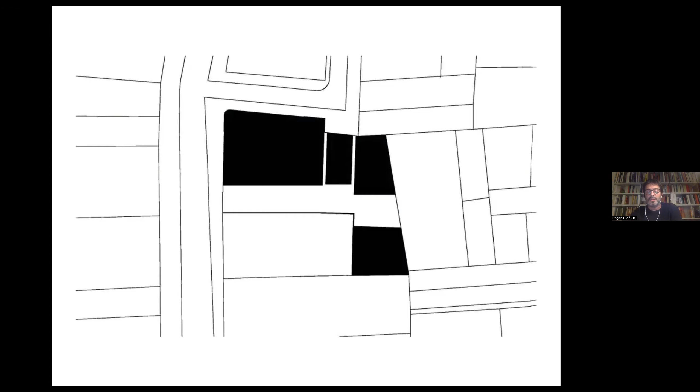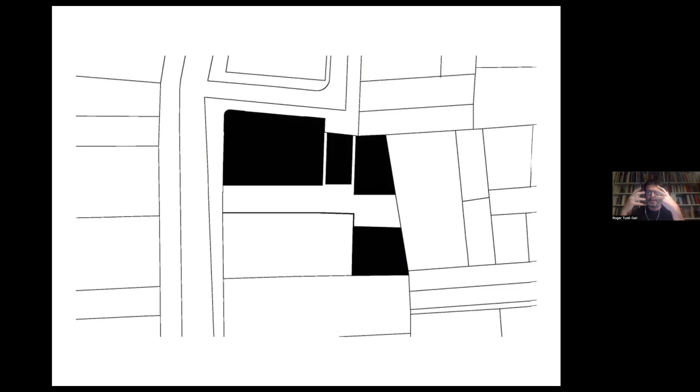We did a selection of what was important, and we tried to improve certain qualities of the space by making a very strategic and quite big demolition. This transformation creates a kind of indoor street crossing the building, providing natural light, providing ventilation, making it possible that the building is reborn with a certain new soul.

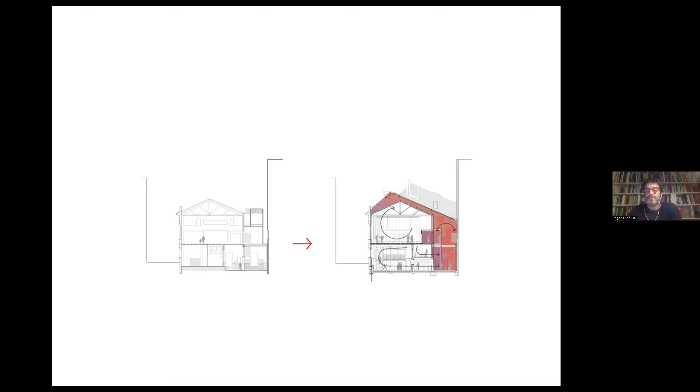So the transformation is something like that. We have an existing building full of additions and strange things. We destroy some of this part, producing like a big street inside. It's not an open street, it's a kind of bioclimatic street protected by a roof, catching the energy of the sun, producing better conditions, feeling like exterior.

I think it's the most powerful thing of this project, because it's introducing quite a lot of things apart from natural light and all that. It's introducing a bigger scale in the building, a public scale, the scale of the street. But at the same time, it's producing a paradox where destroying is the strategy of preservation. So this mismatch is explaining a lot of things, and it's really introducing the notion of time in the building.

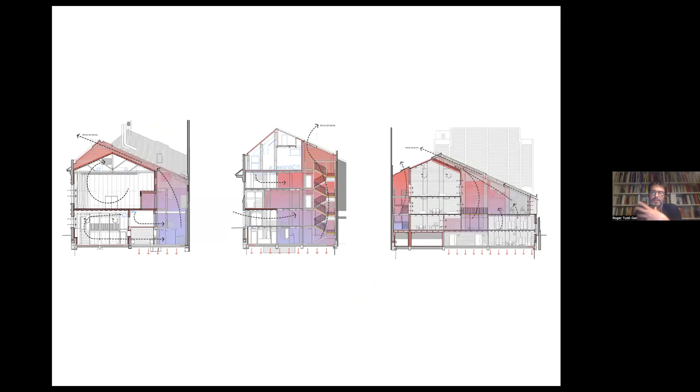So the condition of the bioclimatic area, where the circulations and people come and cross the building, is quite irregular and exciting. It's something that you don't know exactly where you are. And it's producing this kind of spaces.

So this is the big empty space where we add some additional things like these stairs and some corridors to organize all the circulation, and other additional constructions that combine with the existing, but in a certain attitude where the new elements are not trying to be different from the original ones.

We are trying to produce this continuity. The transhistorical idea, in our case, is usually trying not to look for contrast between new and old. There is no interest in that. We are interested in understanding that everything is a pre-existing element and everything will be a pre-existing element. So more or less it's the same. You can see differences, but it's trying to produce the feeling of a whole thing, one thing.

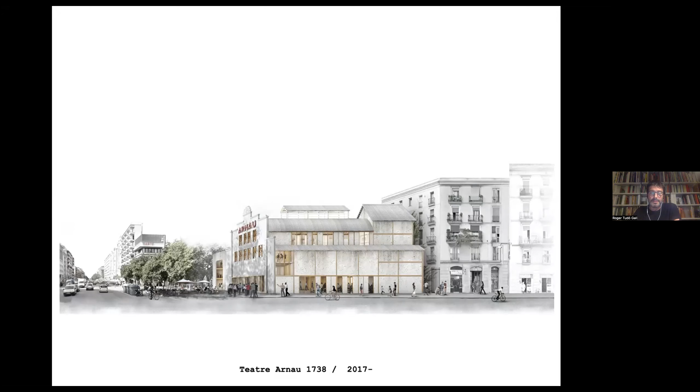This is a competition that we won. It's a theater, quite a special theater, a very ancient theater placed in Barcelona.

This is the Parallel Avenue, a kind of Broadway avenue in Barcelona where all the ancient cabarets used to be placed. It was a very special situation that's been completely destroyed now. Our theater is the only one that still reminds us of this magic moment, like a combination of cabaret, circus, very fragile constructions, very different from a Mediterranean building. It was importing construction systems from Paris or even from the States, so it's a very strange situation in Barcelona.

All the avenue used to be like that. Everything is demolished right now, and this theater is the only one still there, but in very bad condition. So our discussion was how to find a way to reborn this building.

After a lot of observation and analysis, we found that the real nature of this building was this very special structure of wood, really delicate, light and fragile, inside an even more strange condition, a kind of hangar, like an industrial construction between a church section and an industrial hangar. Everything really cheap, really light, and inside this industrial structure they add this other fragile timber structure, producing the balconies and all the ornaments of the stage, but starting from this very industrial element.

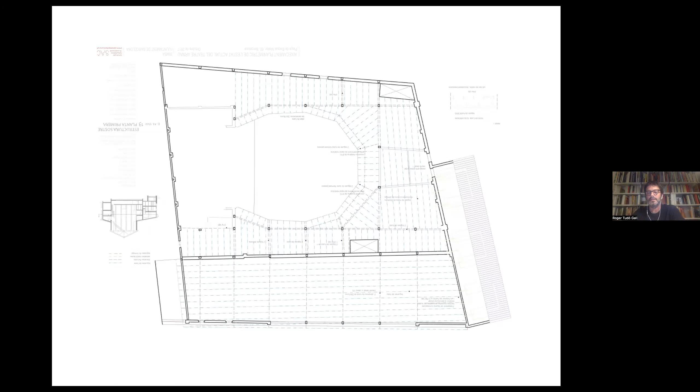So for us, the real substance of the project, what defines its quality and soul, is all these elements, the amount of timber beams with these geometries, combined with the rigorous structure of the big roof. But the reality was that everything was full of layers, transformations again.

So our conceptual approach was: why don't we erase all the layers, and recover just the most essential elements, the structure, with the beams, only the beams, like a little reference from Penone.

So trying to catch a previous stage of the theater, like in this tree, when the theater was younger in a certain way. Then understanding that this structure nowadays is not useful anymore because it's not strong enough to support the new loads for a theater, and it's in quite bad condition, so it's not possible to really reuse it.

So the idea was, why don't we use that as the framework of another structure, so that with a kind of amorphous material we can fill the spaces in between the original structure, in a way that the essential of this structure gives the condition and the imperfection to the new structure.

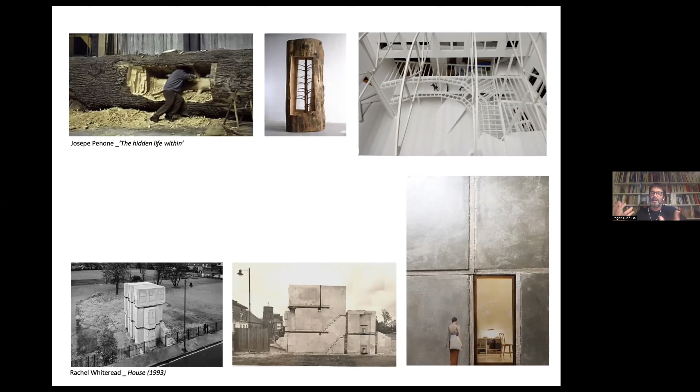So the old timber structure will be there again. It will remain there. It's not going to work completely structurally, just a little bit, but it will be the one giving shape to this kind of lime concrete that's filling everything. In a certain way, it's like a fossil keeping an organic thing inside, a very mineral thing with the new resistance we need for the theater, but catching the ancient theater inside.

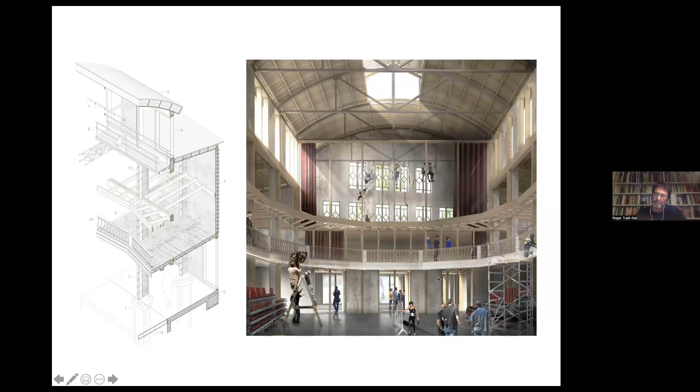So you can see here how new columns are filling the spaces, and sometimes the void is kept just empty because it's not going to be used by people. It's a kind of spider net a little bit, but we are just filling the spaces, and then you have new slabs, new walls, new columns. This idea is just casting inside the existing structure, using the original shapes of the balconies and the stage, and reproducing a new version of the theater in the new plot that's just beside.

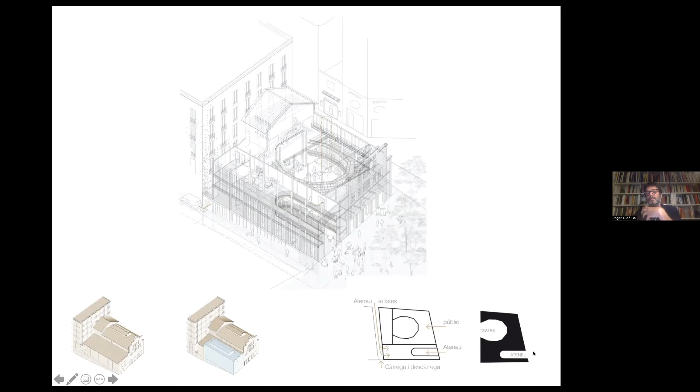This is a kind of social bar with different activities connected with the theater. We are reproducing the same strategy of the balconies, opening the stage to the street. So the building works a little bit like that: the theater inside, and the Ateneu, a kind of bar, open to the street, producing like a small theater that can also be used as a theater, but really open to the street.

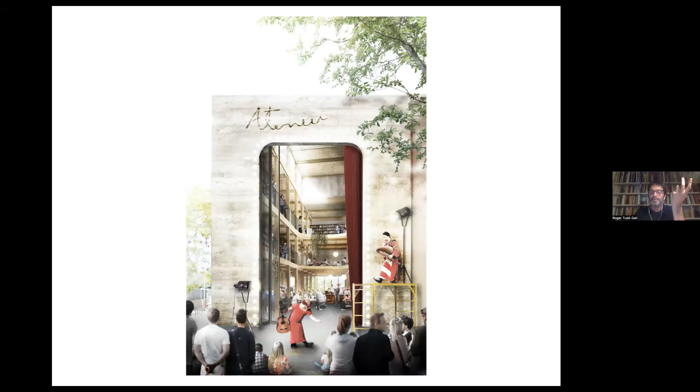This is the original theater seen from inside the stage, and this is the new small theater attached to the original, where it's usually working as a bar, but producing again this feeling of public space coming inside, like an exterior street. But it's a bar, and it's also a library and other things, yet when necessary, it becomes a small theater.

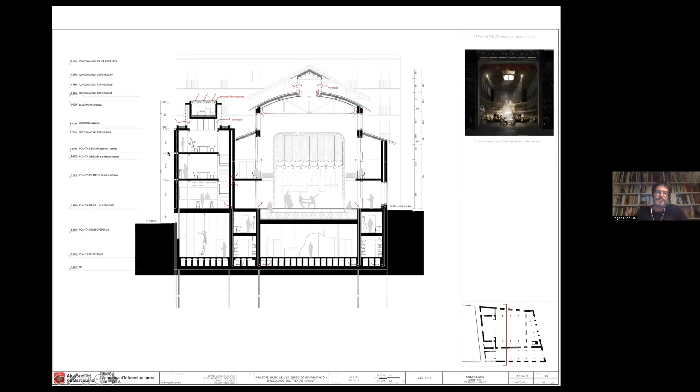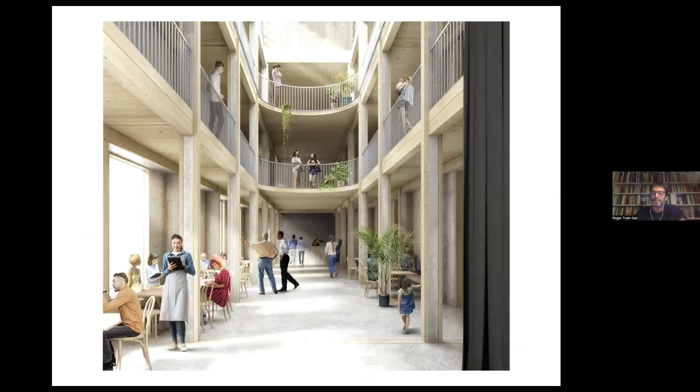So we have the original building and a small reproduction with the same technique, always working with this combination of wood and concrete, producing this kind of space in the bar, connecting with the theater. This specific solution, with certain complexities that come from the original structure, and all the accidents and mistakes that history brings us, produces very amazing and inspiring moments.

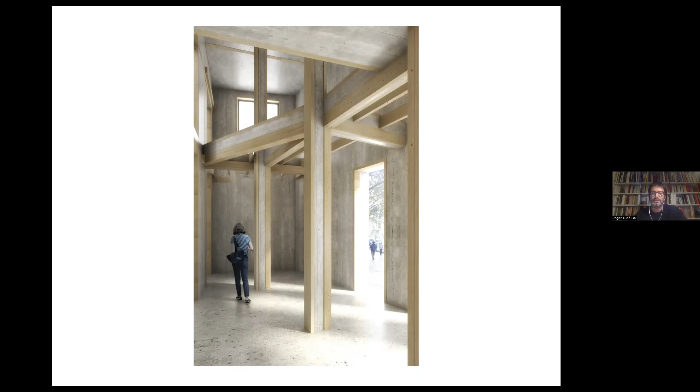This idea that you can find in a specific way of building leads to the idea of historical preservation, so it really brings convincing solutions. It's also related to trying to introduce new steps in the historical evolution, instead of having a very conservative position where historical preservation means only preservation, keeping the ancient things as the original or reproducing that.

We believe in trying to introduce this new tradition - new systems, new techniques that are able to produce the same quality that we really admire from historical buildings. How to be able to be close to these qualities that always surprise us, when everybody likes historical centers and really nice historical buildings - how to bring this condition without reproducing, trying to produce something contemporary but with the same qualities.

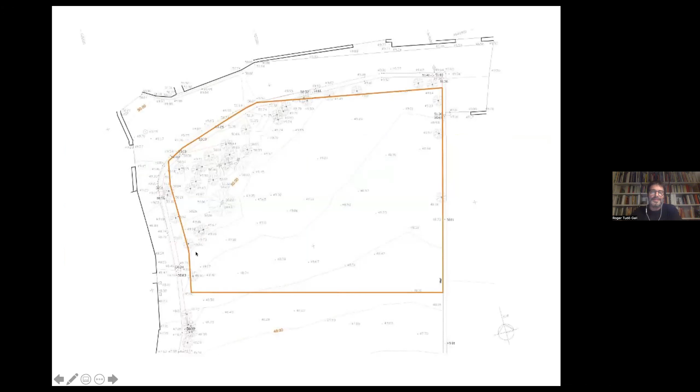But we decided to reuse all the stones and build a new wall in the new position with the bigger street, and to build a house that reproduces in a certain way the idea of the wall, but not as a kind of fake of an original wall from this village. So we tried to understand the real qualities of these walls and make a contemporary version of that.

In our understanding, the real quality in this village is that all the walls are structural walls. They are a single layer, not different specialized modern layers - monolayer, structural - but at the same time we need new conditions for isolation and other things that contemporary architecture needs.

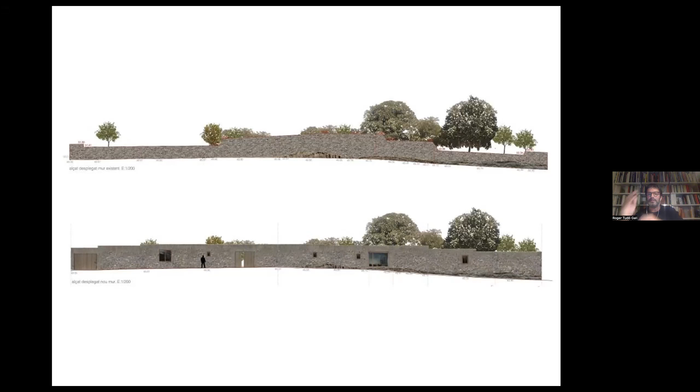So we reinvent tradition, looking for something that's contextually following the same approach as our neighbors, but in a contemporary version. This also strongly affected the typology - the house, instead of being in the middle of the plot, is a very large house organized in a quite radical way because it's so large.

It's like a large corridor. There's a more conventional part with kitchen, dining room, living room, but then everything becomes a kind of radical transition - you cross a porch, which is completely outside but with a roof, and then the rooms are like niches connected by a gallery linking all the different rooms.

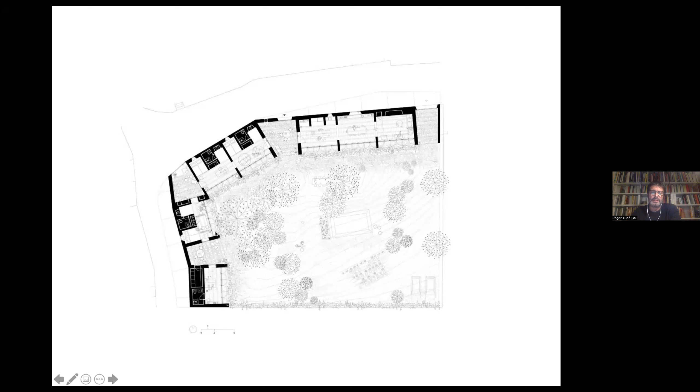So you have to cross in front of the room of your brother or your mother, or go through the garden - because in Barcelona and surroundings, the weather isn't so bad. This opportunity of building a very large house, producing a very opaque, dense, structural wall outside while creating an open feeling inside, was a really strong opportunity, and it's a fantastic place to live because of this radicality.

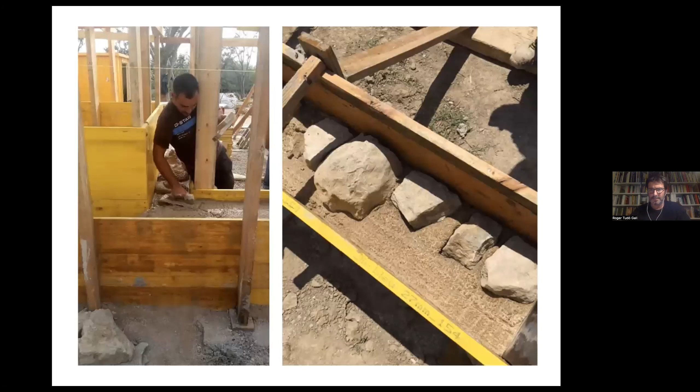This is built with a combination of materials, reusing the stones obviously, but mixed with a mortar made with local earth and lime instead of cement, and introducing a kind of recycled glass that gives an isolation quality, bringing air inside so the mortar is quite light. We produce this mortar like a soap, and it's built in layers, a little bit like rammed earth.

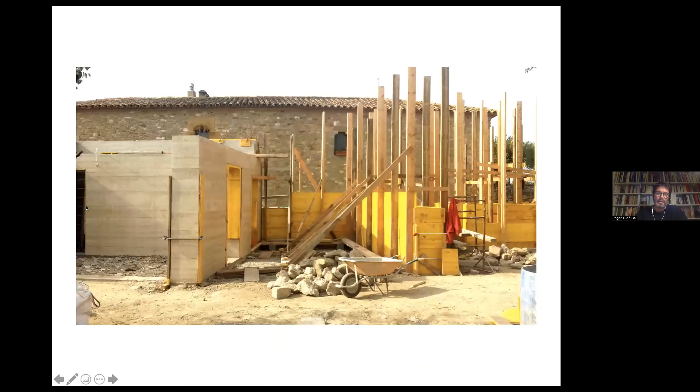And depending on the position of the house, we are introducing stones inside or not. So everything is built like a concrete structure with a framework with wood, but built by layers of 20 centimeters. And then depending on the position of the wall, we have walls with no stones. So when we need isolation, we don't put stones inside. When we are in the facade exterior, we bring the stones to the surface in order to see the stones.

And when we are inside, for example, around the bathrooms or these party walls inside, we fill it completely of stones, even if they are not going to be seen. But we need thermal mass, we need stability, we need to keep energy inside. So instead of a very light wall like that, this is a very heavy wall.

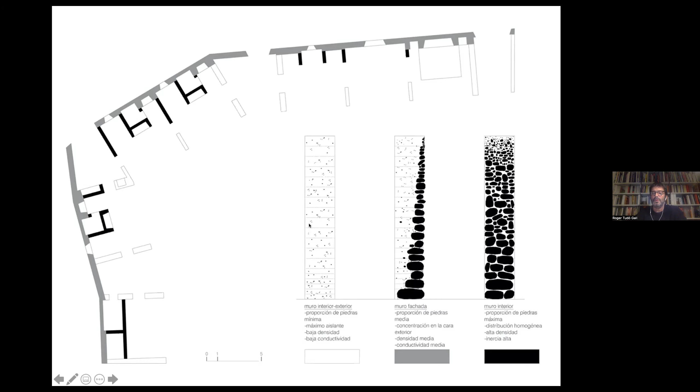And from outside, we broke the surface. So you can see here the texture of the framework, but then we destroy the surface in order to find the stones. So then we have the original stones of the wall in a different position, but with a convincing solution, contemporary solution, structural solution, one layer as the traditional ones. And inside it's changing completely.

This is another idea. It's still with a certain vernacular idea, but a contemporary version of vernacular where everything is open. Everything is becoming a super large porch. It's a fantastic place for living. And then the sequence is adapted to the topography, producing this very strong contrast between very glass and open relation and very heavy and a strong feeling of matter with the walls. This is me enjoying.

And you can go across all these rooms, crossing the structure with this radicality of the beds just beside the corridor. It's like living inside a cave, but with this very, very strong quality of being surrounded by this matter and very connected to the exterior.

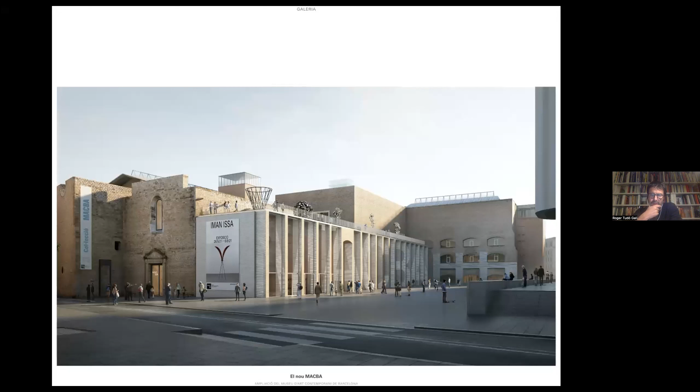And when you are able to find something that is really catching this hidden structure, the syntax of the site or the construction, that is really appropriate for this place, then vocabulary is becoming not important. It's just emerging from the syntax, no? And this is very clear in this project that Monica was mentioning, about the extension of MACBA Museum. It's the Contemporary Art Museum from Barcelona.

As she said, we are doing this together with Christ & Gantenbein. We won the competition and we are working still on that. This is the competition version. But this is a very complex place, very urban at the same time, but full of heritage, important buildings, historical buildings. And the extension is in front of the main building that is here.

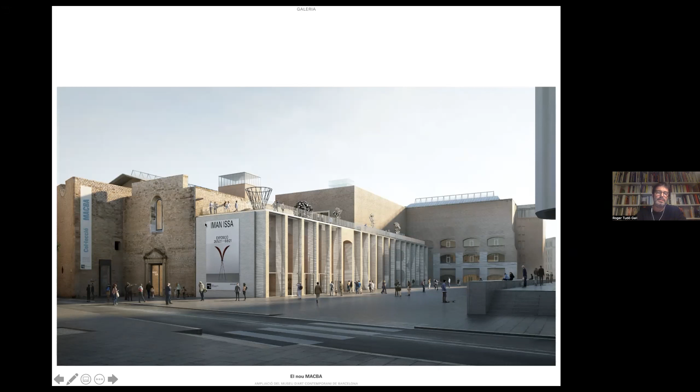So just on the other facade, connected by underground, but extending existing convents, churches, and other buildings, also contemporary buildings. So it's a kind of a mix of different periods. And that was really difficult. And our strategy was trying to understand what was really this syntax of the site.

And starting from this drawing from Clotet again, we discovered that everything in this area, this is an ancient drawing, everything was defined by this kind of space organization based on structural elements. All this area used to be religious facilities like convents, churches, and other things. And our building is in between all this area, and it's reusing part of these existing buildings.

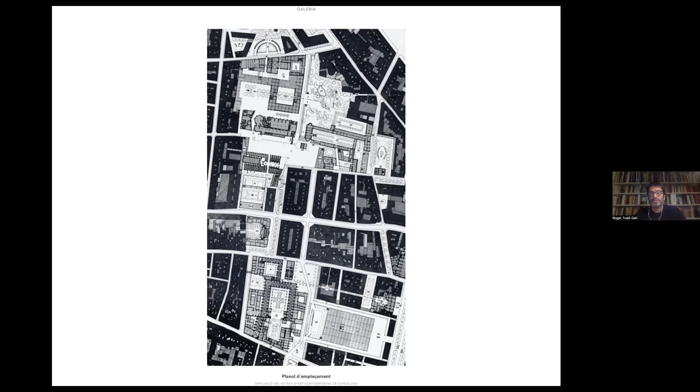So we discovered that instead of doing a new different building, what we should do maybe was a kind of strategy of growing what was already there and what had been defining the syntax of the site during centuries. So the strategy is trying to connect the new museum through the church, the existing church, using the church as a kind of a street or kind of a hall.

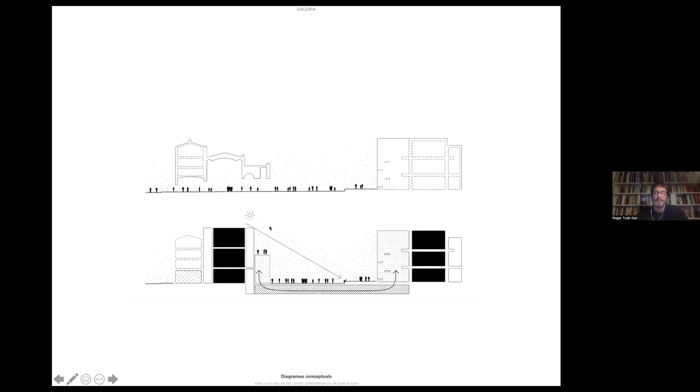And then in another section, introducing the new volume and a lower one, but trying to build everything with a kind of a technique that is extending the original syntax and technology. So the building is something like that, very simple, a very low building, producing a kind of a public roof, trying to reduce the impact of the new building.

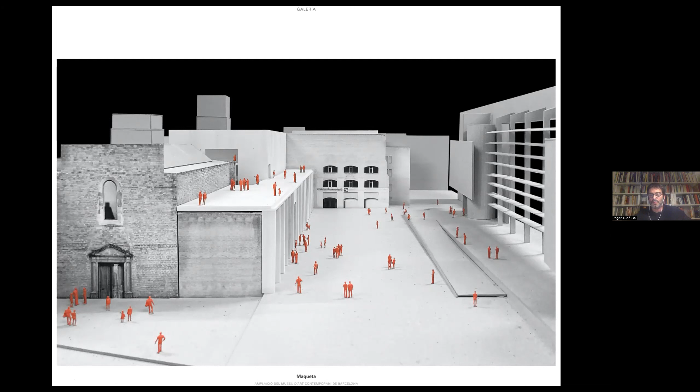So something soft and more human, like a human scale in front of the Richard Meier original museum. And the big cabinets and the big exhibition spaces are just a little bit apart. So in the same scale as the church, and joining everything, there is this kind of portico that is trying to make this transhistorical moment where everything is rooted in one.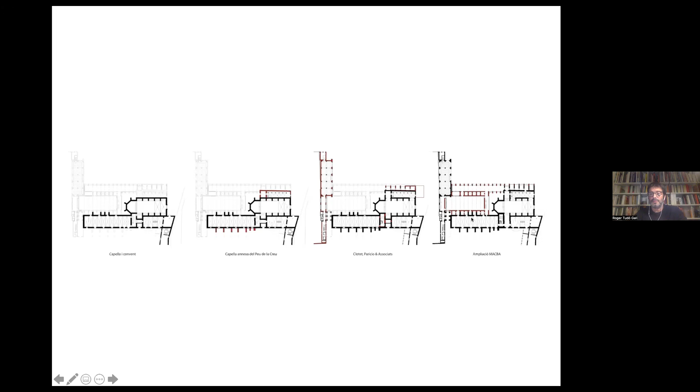So this is the transhistorical evolution of this building. It used to be a convent. You can see in transparency the final version, but also the different steps where everything has been growing, and this is our last step where we decided to grow and to use the idea of the buttresses that is defining everything, all the syntaxes. It's based on structural decisions and the expression of the buttresses, big buttresses. So the new building is extending the existing buttresses, producing new buttresses, big spaces in between, like the original ones, and a big portico joining everything.

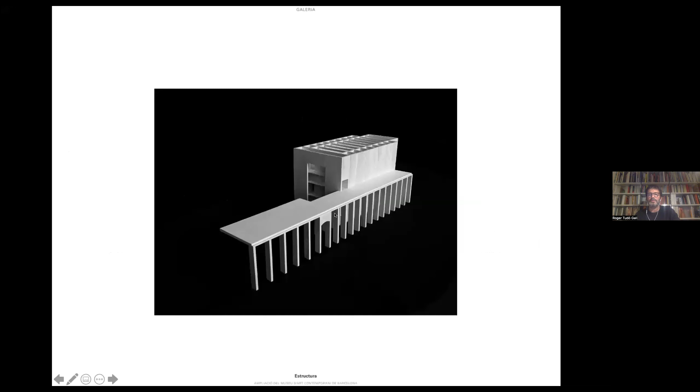This is the final resolution. I'm not going to explain in detail, but again, the complexity of joining everything. Here it looks like more volumes, but in fact, all the strategy of the buttresses is just linking one to the other, producing in a certain way something that is full of layers. So it's transparent, but at the same time, it's very massive. You can see through the pre-existing buildings from different periods, and everything is producing a new reality that is bringing everything together.

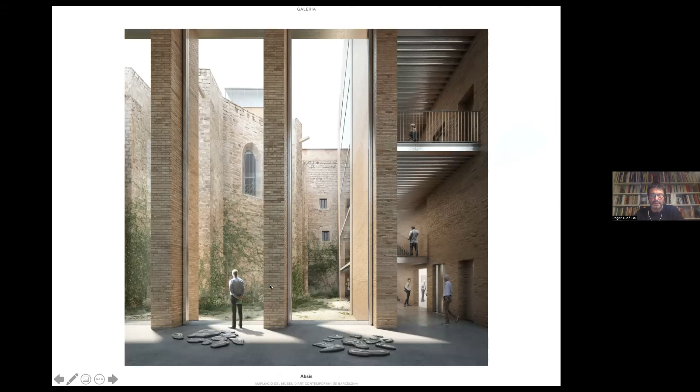So there is a moment where the apses and everything are together, and we try to produce kind of new syntaxes that are dealing with the existing. So this is, for example, part of the existing. So we are trying to work together, and also when it's possible, we broke the rules and we are not following exactly the same system.

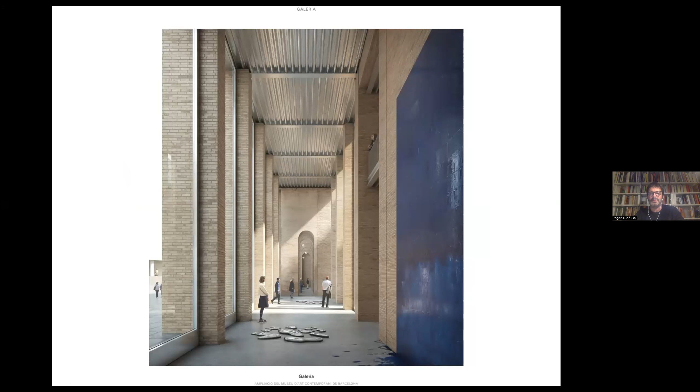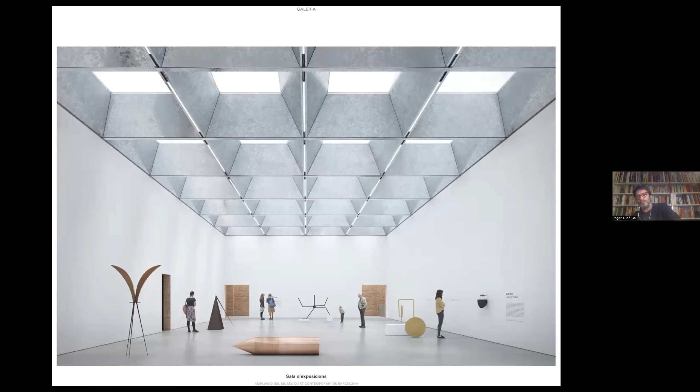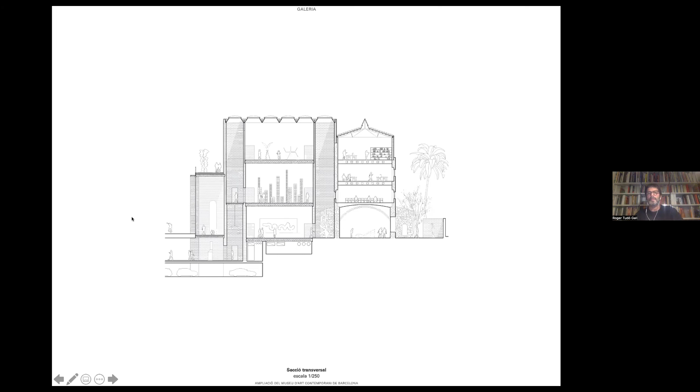So basically the strategy is to use structural walls and buttresses, same technique. Sometimes it was stone, some of the buildings are already in brick, we extended with brick, but just following this idea of a building of big buttressed spaces, again with bioclimatic conditions: big new rooms, buttresses, another room, buttresses. So this sequence of routing one to the other. And finding the technology of that. The walls are completely huge, massive, and archaic, and the slabs are contemporary.

And this idea of combining technologies is connected with this idea of active matter, or the idea that Monica was introducing of organizing matter. When we are using a pre-existing building, it's already something, an amount of matter is there, but if we find a way to activate this building, to improve the existing matter and to bring it to a new metabolic condition, then the idea of something coming from previous periods makes sense in contemporary life or in contemporary society. So introducing new elements that, by activation, produce a new version of the existing.

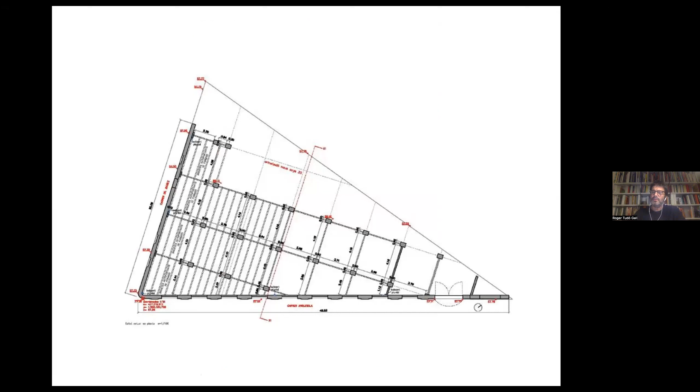This is another Civic Center. It's quite a strange program, combining classrooms for adults. It's quite strange, but it's starting from an existing fragment of a building that was not exactly a complete building. It was just a fragment, and we decided that we wanted to use it. Some of this was protected, but we wanted to use it, and we wanted to build the new parts with the same logic. So growing again with the same technique as this original facade.

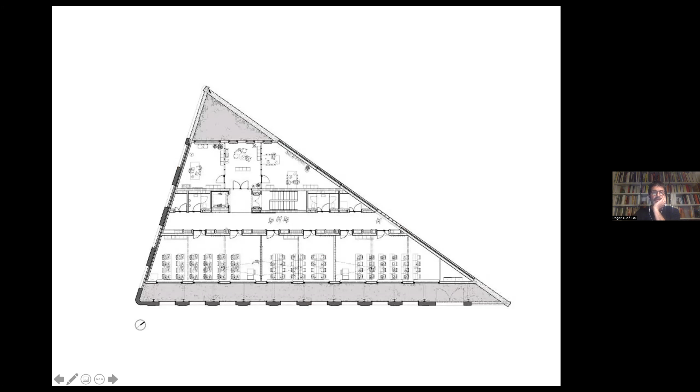So structural walls, bricks, and then inside building something with the same technique, structural walls, but obviously introducing these contemporary reasons. And you can start to see here again bioclimatic spaces that are improving the behavior of all that. But again, the walls have a certain archaic condition, really big. In this case, combined with these glass bricks, because the original building used to be a glass factory. So it's a kind of memory of the original, but basically we are working with a traditional structural wall, extending and using the original one. So this is still working as a structural wall, and the new parts are with the same technique.

And on the top, you see that there is this new thing. And this is what is changing everything, and it's the active part of the project. So we have a very massive building on the bottom and something really light on the roof. It's a roof that is protecting from the rain, but at the same time, it's a solar chimney that is moving the air and taking advantage of all this massivity. So this is the combination with the existing, extending, combining with other materials, sometimes producing a second layer inside.

But the main problem of the building was that it's really full of people, adult people in small classrooms and polyvalent spaces with a lot of people breathing and producing internal heat. So in Barcelona, it's quite warm in summer. So we have a double problem.

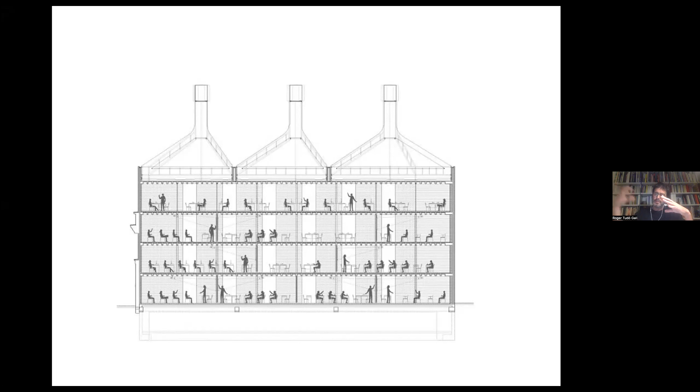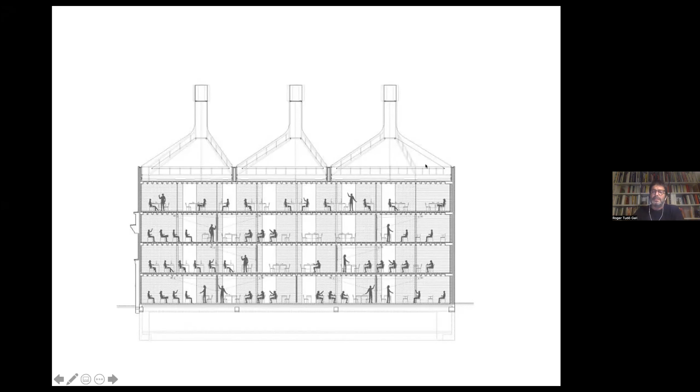So during the year, this building is breathing and it's open. It's completely open because of the direction of the sun. In winter, it's just moving a little bit of air just for the quality of the air. And in summer, when we have the problem of the warm, we have the advantage that the sun could be a natural engine. So the sun is working as a natural engine, moving 10 times the volume of the building in 1 hour.

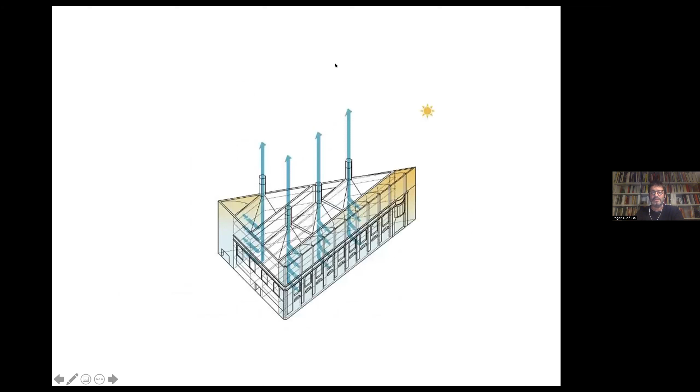So the building is catching air from the underground. It has a bioclimatic buffer. Then the air is going inside the classroom and it's going out, sucked by the solar chimney, something like that. Then the combination of the existing and the new is trying to fit because of the techniques. And this is the bioclimatic in-between space, the classroom facing the existing, something in between like corridors, the other side with other kind of spaces, connecting with another bioclimatic space that is connecting with these chimneys. Again, you see the transparent and the black, the air is coming out.

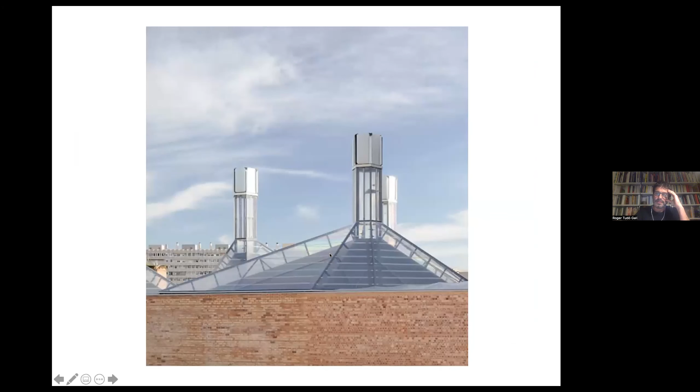Obviously, after a lot of investigation. And this is producing this amazing idea that the building is doing it itself, and it's really taking advantage of the massivity of the building. We can have an open building because it's really stabilized with this amount of matter, but at the same time, the air is moving naturally.

And this is the last example. It's talking about the idea of the existing one. It's not exactly the building. It's something that is surrounding you, but it's producing a lot of influence, and you need to be rooted to the existing. This is a winery that we built in this small village in Gratallops. They are producing in all the village really wonderful wine, and it was obviously the problem of the context. It's a very vernacular context.

Our building is this one. It's beside the church, which is quite difficult in terms of context, and at the same time, it's so close that it's quite difficult to build close to this building in terms of techniques. But on the other side, there were all these pre-existing neighborhoods here and some other pre-existing walls in our plot that were introducing certain complexity about how to deal with everything, how to be rooted.

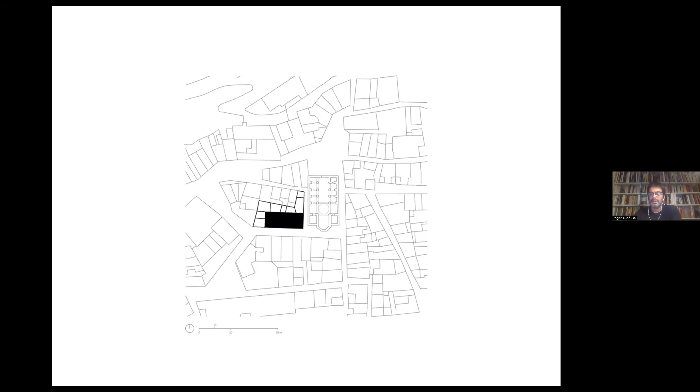The reality is something like that. This is the church, it's really tall. Smaller houses all around and neighbors all around. This tree was inside our plot, but now it's not there. That was an existing building but destroyed, with very interesting and tall, like 15 high walls made with stone. Very amazing, very high walls and very big walls, heavy walls. So that was our original matter, our pre-existing condition, our preservation, and all the relation with the neighbors here, houses. It was a problem of privacy, but at the same time, a very beautiful relation.

And following the urban conditions, it was allowed to build all the footprint on the ground floor, but on the upper levels, it was only allowed this black area. So it was necessary to keep something empty. We finally decided, in order to find this rooted relation with the context, to create again a kind of street connecting or creating a distance between the complexity of the neighbors and the existing walls here.

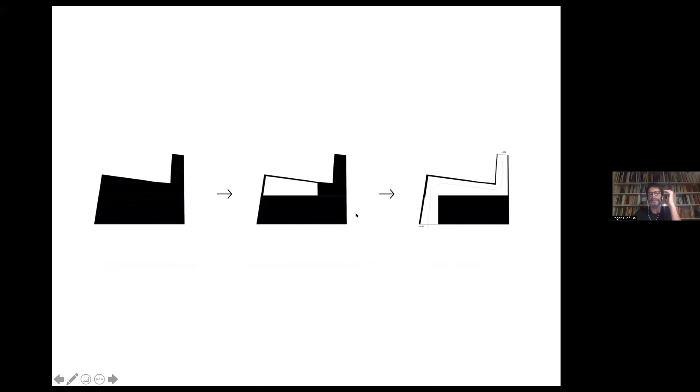And the new building that was going to be that. So we produced the biggest regular and higher building that we can build. And the rest, it's quite empty, not empty completely. It's connected by a kind of roofs, but in another scale, producing something that it's like an exterior street, but with some rain protection. So you can see the complexity here, the houses, the existing walls, and the new

winery. Trying to go a little bit underground, but not much, because we have the church, and it was dangerous to make a very, very strong underground area. So we have a thermal problem also. Usually wineries in Spain, when it's possible, they are underground because it's the best thermal conditions, stabilized. So another big problem of this project, apart from the context, was how to produce the conditions for the wine that are very strong in terms of climate without being underground. Underground, it was only the barrels.

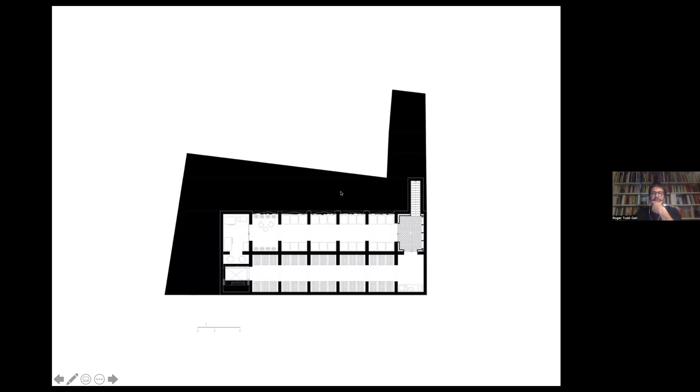So all this amount of bricks that you will see here is looking for the condition to produce something similar to being underground. So this is the underground. This is really a comfortable place for the wine, the barrels and all that. This is just the storage, the natural stone. And on the ground floor, you can see this street that you can come from here and from the other street. So you can just go across. It's open to the people, but can be closed during night.

It's a logistic area for the things that can be outside, that don't need specific temperatures, but at the same time is the circulation for tourists or tasting or something like that. And this area, it's roofed by different levels with the stairs. You can go up, have different terraces, always outside. And inside there is this big room with the tanks surrounded by different layers, and with this really massive solution that you can see here. This is a wall made with 7 walls of bricks, like 1.5 meters of wall. And you see here different levels of these terraces.

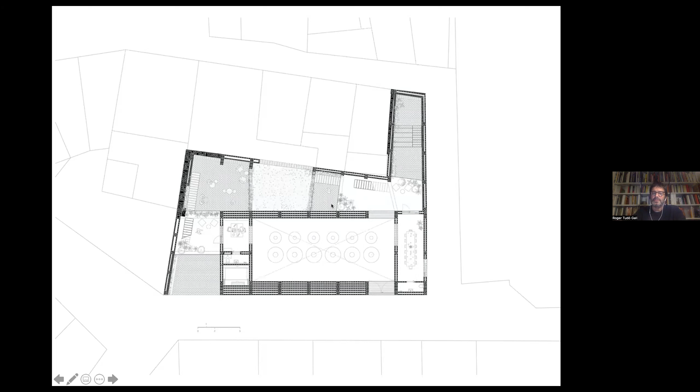So this is the context. Again, for us, it was very important to produce the syntax of the place. So very difficult to build something big, very difficult to build something that is contemporary, but surrounded by vernacular. So we found something that we think is working. And there is this big entry for trucks and all that. When you come inside, you start to realize all these existing walls and the different levels for tasting and tourist activities. Then inside you see the tanks. So there is always a kind of visual relation between this street and inside. And this is always protected from rain, but open to the climatic conditions.

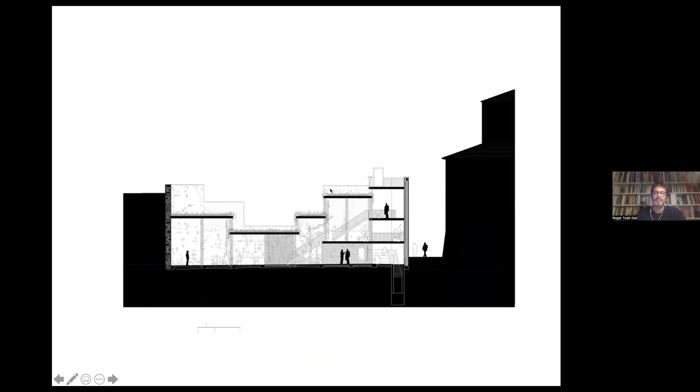So these roofs are the ones that are really connecting the pre-existing neighbors' walls, the different levels, and producing a kind of soft relation with them, connecting the walls that need additional support because they were so tall that they need a kind of buttresses also. So everything is working together, producing an in-between space prepared for enjoying, and then inside is the production. So the different layers, and there is a final moment with the patio where you are connecting with the other street outside.

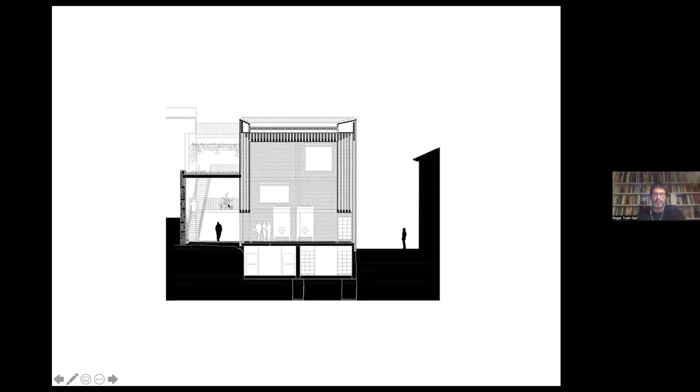This is the section. So again, from outside, the brick is finished with a kind of lime painting, very rough painting. You still see the brick, but it's a very dense and imperfect surface. This is the volume, and when you come inside, again, the big room, then there is this thermodynamic moment where all these layers, 7 layers, and all this roof made with bricks, again, it's a system to keep the temperature a little bit like underground. So when the temperature of the night is okay, they can open, and then the air goes through the walls, refreshing all this mass, so keeping the fresh of the night.

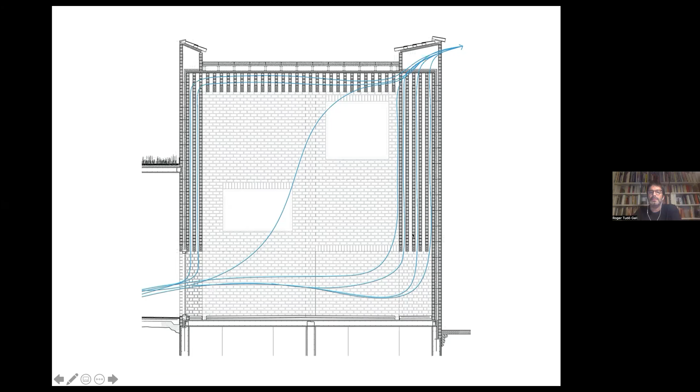Well, this is all the complexity of the bricks, that it's amazing. Then the roof is also made with the same, it's a kind of radiator of bricks. But the problem in Gratallops is it's so warm in summer that natural ventilation at night is not enough. Night cooling is not enough. So we made this invention that uses not only the night temperature, but also the night radiation. So we are using a water roof that during the night is outside. During the day, it's inside the insulation in connection with the bricks.

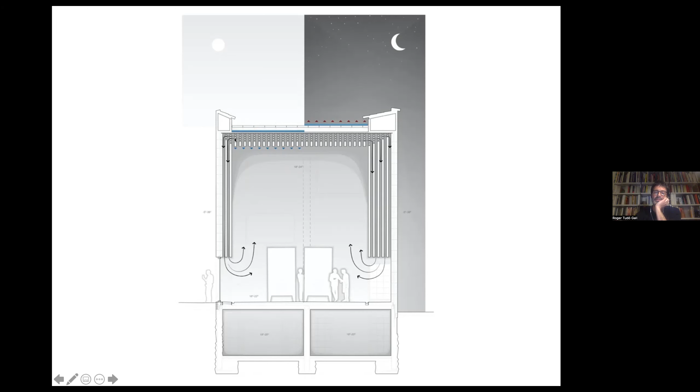During the night, the water is dissipating all the internal heat and taking the fresh of the universe. So it's exchanging by radiation with the outer atmosphere. You know that it's minus 300 degrees or something like that. So even if it's quite far away, and the temperature of the air maybe is not so cold, by radiation you still have an exchange. So this water becomes fresh at night in summer, and then during the day it's falling down inside, refreshing all the bricks, and then there is a natural convection extending this energy of the water through the walls. And obviously the tank is affected by the walls, the wall is affected by the air going through, and by the radiator where the air is crossing, and over that there is the water roof that is connected with the universe.